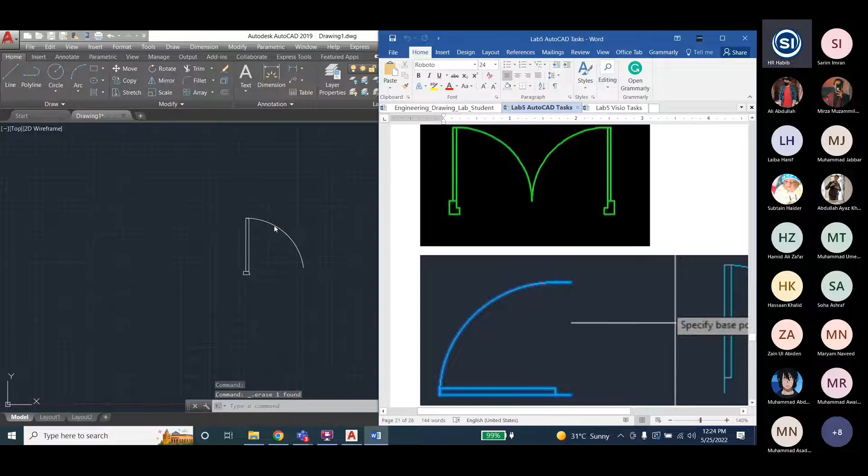Now you want to color it. First you can group it, select, just click and drag, and then click again, it will be selected, and then you can group it. Group option is available here also like this. Now it's grouped. No need to rotate it, otherwise you can also rotate, but now our door is ready.

Now we want to replicate it, just mirror. We want to use the mirror command. So how to use mirror command? Now we'll go to Modify. There is a mirror command, this one. This one, first command we want to use, this mirror command. Okay, so here is the mirror command.

Modify, mirror. You can draw any other figure. Maybe if you feel difficulty drawing this figure, no problem, just a simple figure you can also draw. Just go with the flow and do what I'm doing. Just follow me and click this modify command.

Just mirror, select object, I have selected. Then press enter. It will say specify first point of mirror line. So the mirror line is like this. For example, I want to mirror it, I will draw a line for you, like this one, and it can also be mirrored in this way.

In this way, I will color it first. Right click, maybe you can color from here. Yes, you can color, and you want to change the thickness. Properties. Can you change the thickness?

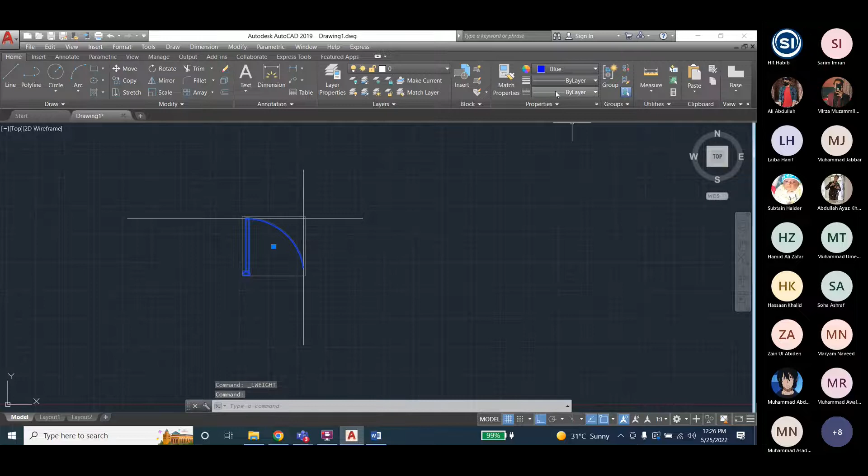Okay, maybe you can change the thickness. Just change your thickness, if you will change, then let me know. Yes, here you will go, for example this one, and display line weight must be checked, then okay. Then maybe update command. Selected, and yes, in this way you can change.

Now you can see here that, for example, I want to mirror it. So mirror, just click the mirror, select this object and press enter. I want to mirror, specify first point of mirror. I want to mirror along the vertical line, meaning it will mirror to the right of the vertical line. So for example, vertical line this one and then this one. So you see, oh sorry, again.

Mirror, select the object, enter, first point, then there is a second point. And then it will ask to erase the source object. If you want to erase this source object, then you will say yes, you write yes and press enter. By default it is no, no means it's okay, no need to write no, you can write no also, otherwise no need, because no is default, just press enter. When you press enter, you can see this is mirrored in this way. And if you want to mirror it along the horizontal line, it will be mirrored above the horizontal line. For example, modify, mirror, select the object.

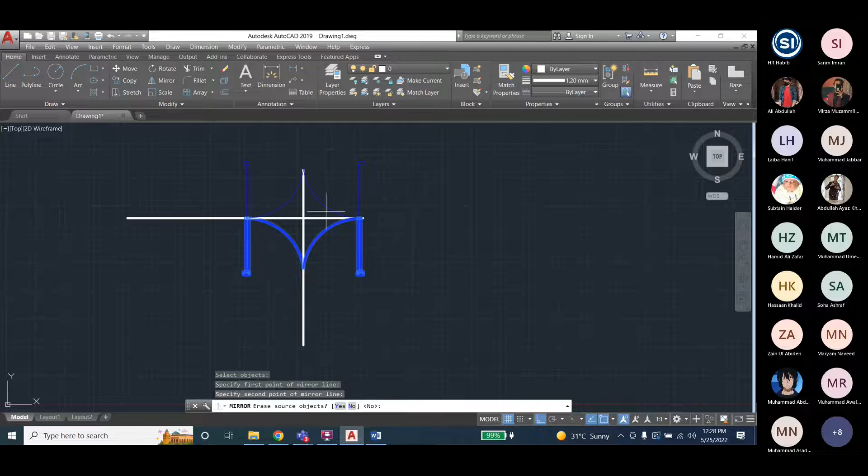If you select both objects, that's also okay. Pick a specific point, for example along the x-axis, this point and this point, then press enter, and it will mirror in this way. So now you have the concept of how to mirror an object.

In the modify command, I have switched ortho on. If ortho is not on, you can still mirror: select this object, press enter, and now there's no line, just specify the first point of the mirror line. No problem, just select this point, for example, like this.

In the vertical position, when you drag your mouse, you can see the placement of the object. And when it is confirmed, click it here and press enter. So like this, and also ortho will help you place it exactly.

At right angle, for example, if ortho is on, you will see if you click it here, it will place here. And if you click like this, it will place below the horizontal line. In this way it will place right to the vertical line, taking the vertical line as the base point.

Similarly, you can do this, only vertical because ortho is on. If ortho is not on, then you can move it and rotate it anywhere, as you can see here like this.

So if I press F12, I want the specific second point of the mirror line. You can see this one is 0, this is 0,0, okay? I will take it as 0,0. This is 0, then shift enter.

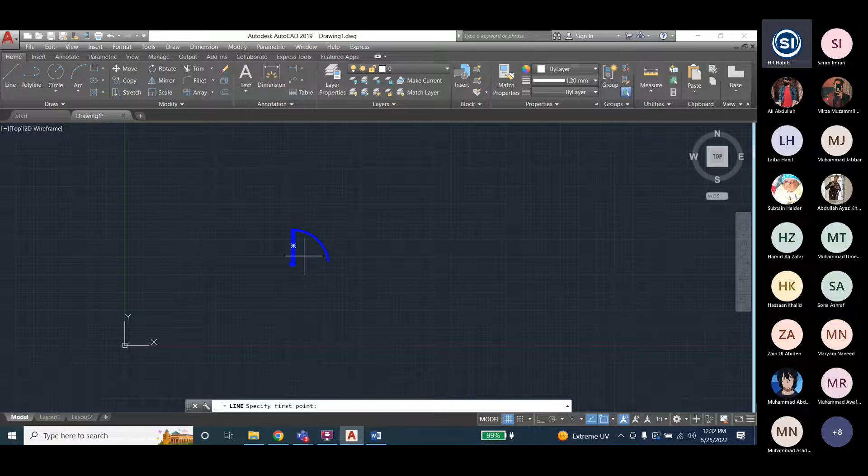If you want to see this base point, how do you check these coordinates? How can we check the coordinates? You can see here that the coordinates can be checked.

Under Dimensions, there is an ordinate option. We used ordinate last time. So I will place ordinate here. 28.0 and then...

Ordinate: so this is actually the x-axis distance, 28, 28.04, and this is 12.03, 28 and 12. So I will take 28 and 12, then I will apply 28 and 12. Just remember it.

Yes, and now I will just apply shift F12. Shift F12, yes. No, again shift F12, I want to write in the command window.

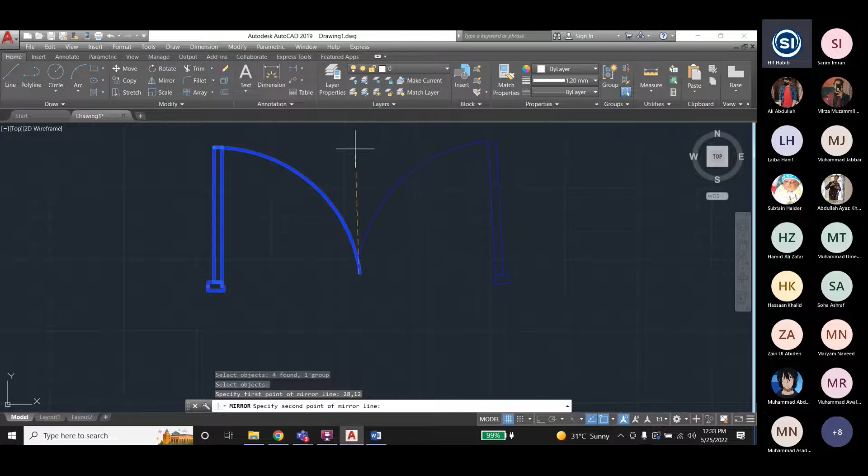First specify first point - first point is 28,12. Yes, specify second point of line. Second, any point I can specify, for example 28 and 12, meaning 28 - x is same, 12 meaning I can write it 20, for example, any vertical point.

Then it will ask to keep the source object, no or yes - I want to keep it, don't want to erase, press enter. Yeah, like this, but the exact point is not there, so you can specify the exact point like that. So in the command window, you can also write it this way.

So mirror is done. The next one - if you have any question, you can ask. Now, copy - I want to copy this. So let's...

Go to copy, select object. For example, you have the rectangle - I want to draw any rectangle. This is the wall, for example, this is one side wall of the door. This is 2D dimensional, and here you can see, for example, a door.

So I want to copy it. Go to copy, select the door like this, then press enter. Specify base point - for example, my base point is this one, and then I want to place it here. With ortho, you can place it on like this.

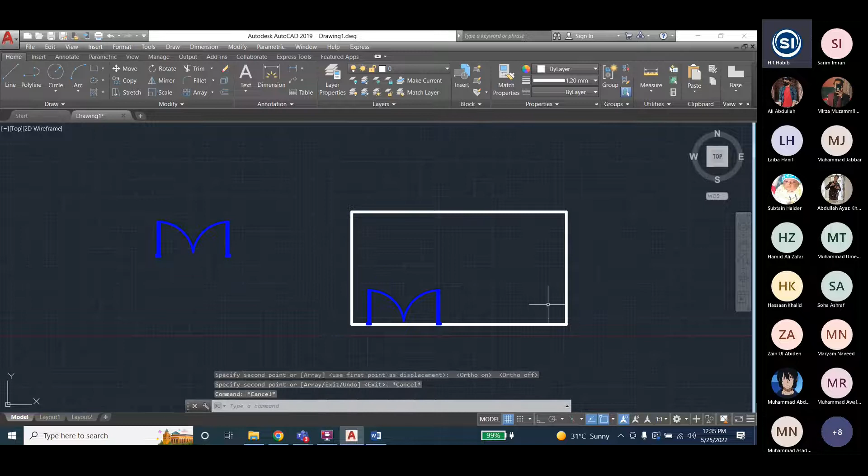I want to place this like this. So the door is placed. Now, for example, here the door is one, the door is also here. So I want to copy it, modify and copy, just like this object.

Click the copy, click this one, press enter, and then you can just click this one and place it. If ortho is on, it will be exactly in horizontal position like this. For example, one door is there, or two doors, you can move also if two doors are here like that. So in this way you can use the copy command.

Then there is an offset. For example, there is another rooftop of the building, a rooftop of the building here. Say you want to use this rooftop for the installation of solar panels, or you want to use the useful area. The useful area is not the boundary of the wall, because if you want to install solar panels, you cannot install them exactly at the boundaries. You want to spare some space from all four sides of the boundary. So that is called offset.

So in modify, offset, just click specify offset distance. For example, you want to place, because we are working in inches, I will say 2 inches. For a small building; for a bigger one the size maybe in feet or meters. So here, for example, I will say 2 inches from all sides.

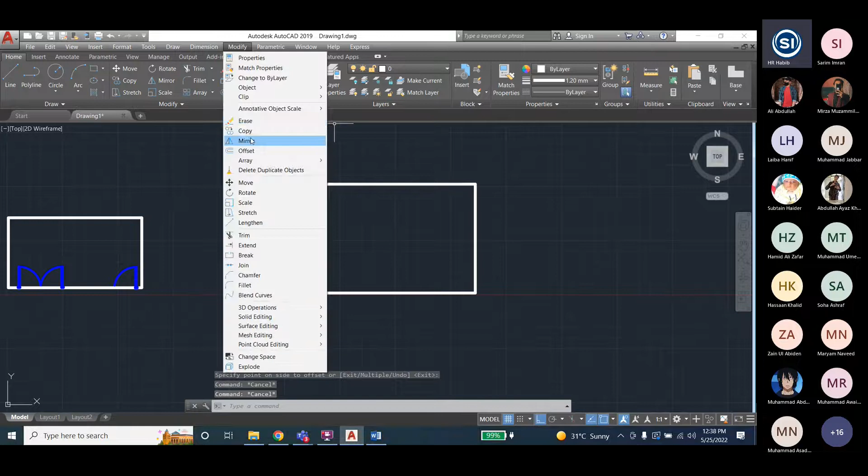So you just move the mouse outside, and it will say the offset is placed outside. If you move the mouse inside the object, it will say the offset is inside. You want it inside, then you press enter - no, not enter, you have to again go to modify, offset, it's already mentioned. So just press enter, select the object, move inside, for example here, and it will say specify inside. Left click on the mouse, then press enter. Before pressing enter, you have to left click on the mouse. So the offset is placed inside.

So identically, 2 inches from all four sides is spared. This area, we are not using, and this is called the offset. Now we will place all the solar panels or everything in this area, and the outside area, which is the 2 inch offset, we don't want to use. For example, we want to walk through there, or need some space just for cleaning or something like that. So these are the practical applications.

You can also fill this using the hatch command in draw, and pick the point inside like this, and fill it with any color like this. So in this way, you are done.

Now the next command, offset, and then there is array. But before doing array, maybe we can finish rotate. So rotate is the last command. Let's rotate it.

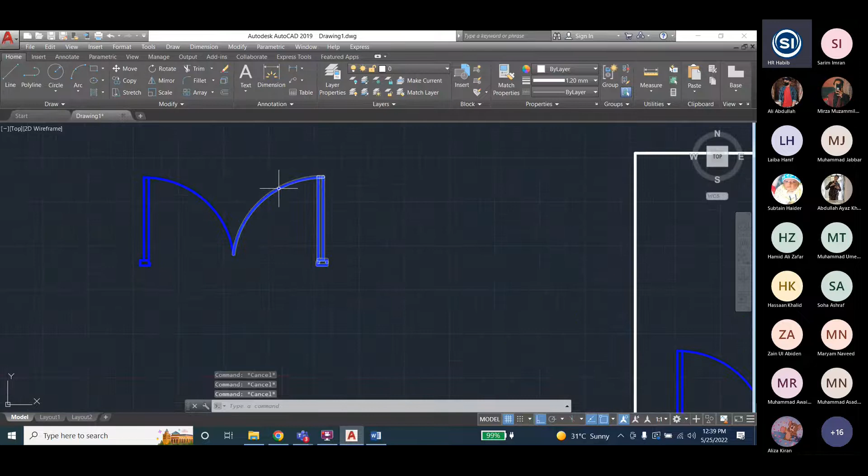For example, this door we want to rotate and place here on this side, this wall. So we want to rotate. Just go to modify, rotate, select the object, this object, okay, and then press enter.

Select as many objects as possible, then press enter and specify the base point - the point where you want to rotate will be fixed. For example, at this point I want to rotate, so you see this point is fixed and the remaining whole object moves around this point.

Now it will say specify the rotation angle. You can switch off ortho if you want any angle like this. And if you want to exactly specify vertical, ortho on will be helpful - only with the help of mouse you can do anything, no need for this, only 90-degree rotation on the axis like this.

If you don't need ortho and want to specify rotation angle, you can type it. For example, this angle is 270-degree, this is 0-degree, this is 270 and this one is 180. This is 180, and this is 90, okay?

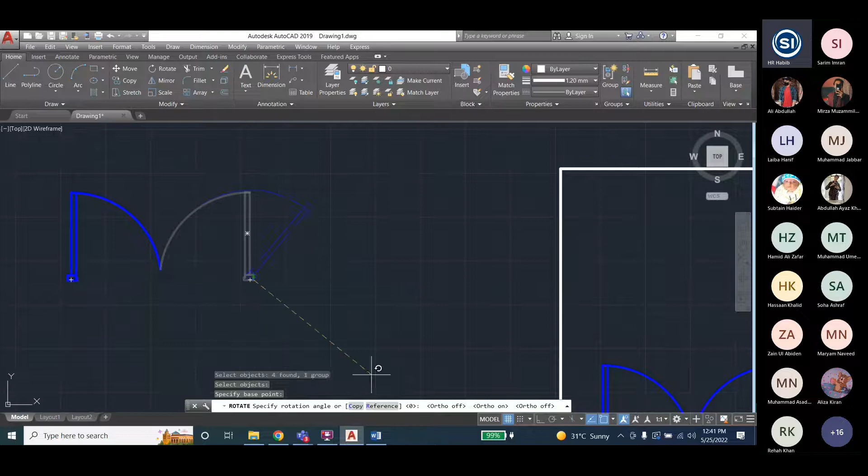With the help of mouse, you can see which angle you need. We need actually this angle - this angle is 270, so I will write 270 and press enter. So you see it is rotated.

Now, for example, I want to move it here, and the whole object I can also rotate. For example, control Z - I want to rotate the whole object. Go to modify, rotate, select all objects like this, in this way you can also select, press enter. And for example, pick this point and then 270.

So in this way you can move. Now select this and you can move - for example copy also and move also. Move command we can use because we don't need this source object. Move command is also part of these modify commands. We already used copy today, now we will use move - move means move, no need, there will be no source anymore, it will be totally removed.

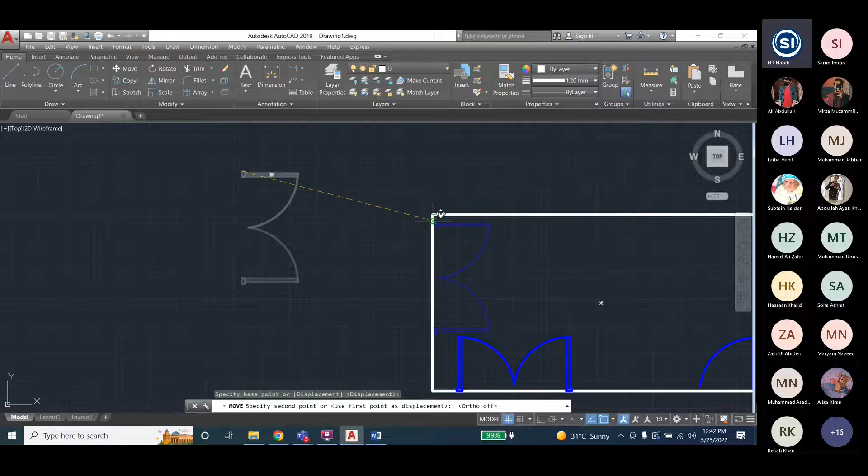For example, move, and we want to place it here on this wall - on this wall the points will be this one or this one, so we will choose this base point. For example, from here it's easy, so I will choose this point, so it will be easy for me to place it. I want to place it like this - you can turn ortho off if it creates a problem, then you can place it here. So in this way you can use the move command also - rotate and move, we both used.

So now this lab 5 is done and array is remaining. So now we will apply the array command.

So in the array command, you can see here, I will apply the array command. First, for example, I want to array. Why do we use array? Array we need just for multiple objects - if we want multiple objects of the same size and everything the same, then we can use the array command. Multiple rectangles we want to draw - why copy paste, copy will take time. So you can use the array command, let's try.

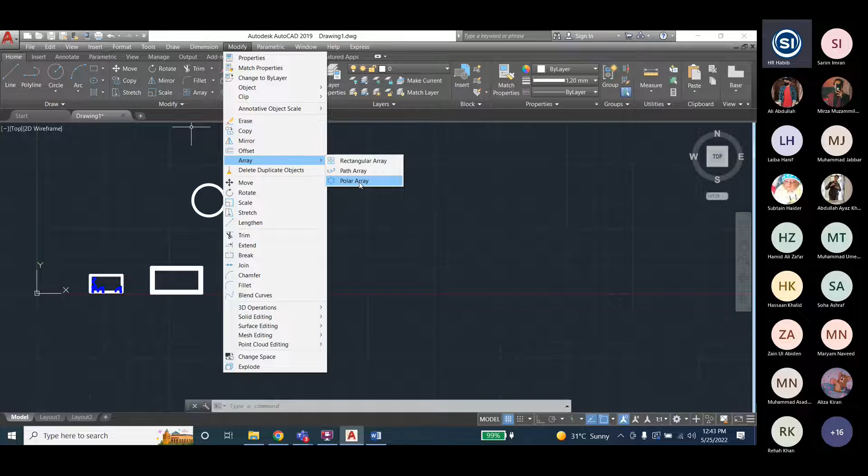So for example, this one is the circle and I want to draw these circles multiple times. I will go to array and rectangular array first - rectangular means rows and columns, polar is around, you can say polar around 360-degrees. Rectangular array will say select object, I will select this object, as many objects as possible you can select. For example, I will draw one circle inside this rectangle, like this, and I can hatch it just to make it beautiful, like this.

You can pick point for the old version, otherwise this. So like this is our shape. Now I want to place these objects with the help of grouping - for example, this is the complete object, I can group it, so now it's grouped. Now it's a complete object.

Now go to modify, and then there's array, rectangular array. Select this object, press enter. So it will place multiple arrays like this, because by default it's 4 columns and 3 rows, and you can say 3 rows and 4 columns - 4, 1, 2, 3, 4 columns.

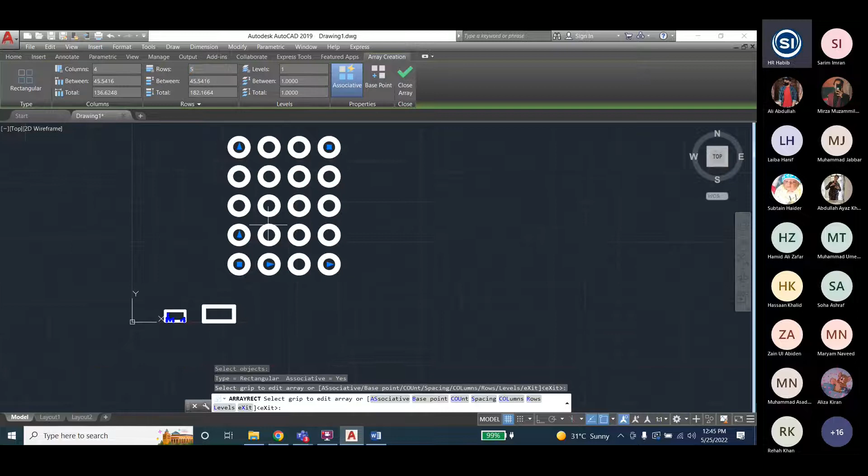So I want to change rows, for example from 3 to 5, and you can say 5 rows, 4 columns, okay? And similarly, rows is only 2, for example - so the rows are only 2. So in this way you can change it.

And the distance between the columns, 45, I will change it to 30, for example. So in the columns, you can say these are 35, 30 - 30 is very congested, very little distance, I will take 40, for example, 40. Similarly for rows also, distance I can say 40 - 30 rows distance will be very less, you can say overlapping, so I will say 40 is okay.

So 40, and level is, oh yes. When you click it in the newer AutoCAD version, this window automatically appears. This is the array window. If you close this array window, it disappears. When you click this again, the array appears.

And there is also an option called array edit. If I click and select the array, here is the option for different things, like replace, base point, and so on. You can replace any other object with this one.

So select this one, and then levels. Levels is 1. Level 1 just means go here. For example, go here, you can see north, south, east, west, and there is a home option. Just click home, you will see it in 3D dimension.

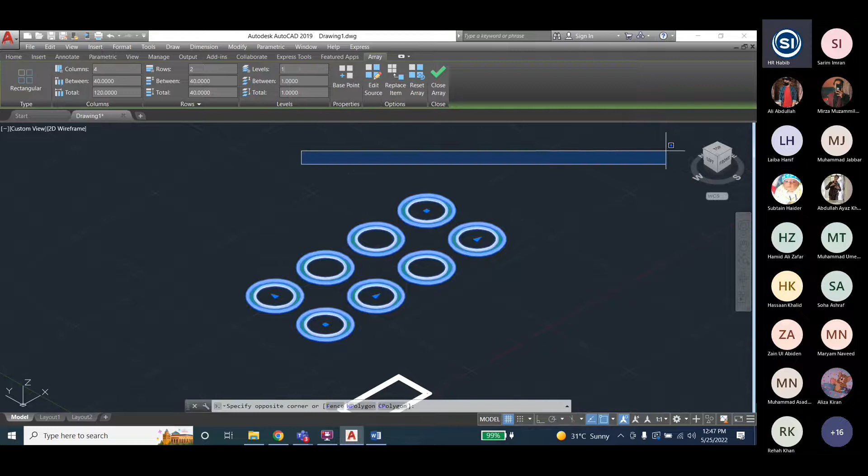When you change the level, for example, I will change to 20, level is 20, so you see in the Z axis it is extended. And level 1, like this. So again click this top, and you will be in 2D dimension. Now click this object and here you can see the replace item option.

You can replace the item.

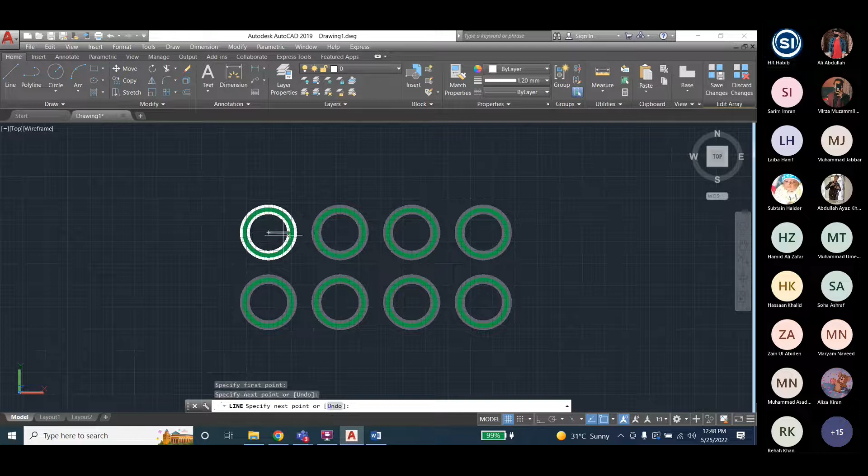Now you want to edit this object, so just go to the line command, for example line command, and I will draw a line like this. Press escape. You see this line is drawn in all circles, so no need to repeat again and again. Just edit in one circle and everything will be changed in the remaining circles.

For example here, like this, and like this, like a vehicle tire. So in this way you can...

Now discard changes or save changes. It will be the same. Discard means it will be discarded. So save changes, I will say save. So saved. Okay, I will click again, and now there is a replace item option.

Replace item, okay, let's replace this. Now to replace, I will draw any other circle and I want to replace it, for example I want to replace with a rectangle. For example this is a rectangle, and I want to replace this circle with this rectangle.

So you also try, for example, replace, select replacement object, this object for example. Press enter, select the base point of replacement. So it is taking this one as the base point. For example, I will... okay, enter.

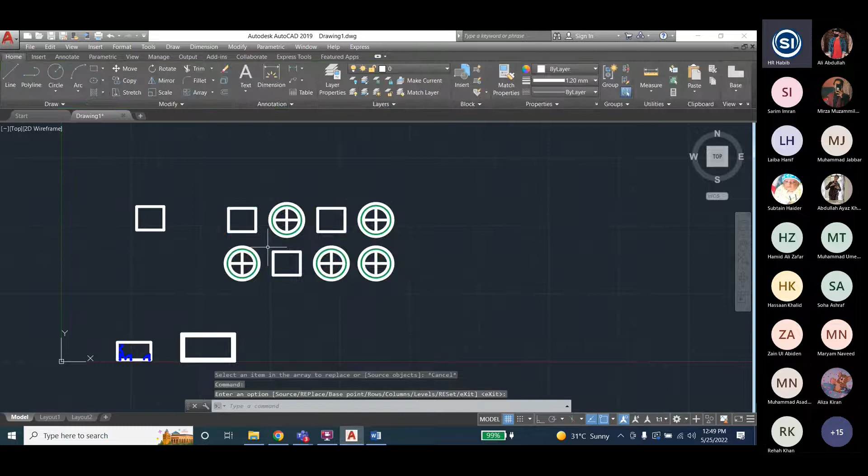So you see, all the objects which you wanted to replace are replaced. But keep this in mind: when you want to apply these changes, use replace item, and then it will say select replacement objects. For example, I draw one circle like this, and I want to replace this with another circle.

For example, this is my shape, like this, and I will group it. Just group it, group, no it's grouped. Now I want to change this with any other shape. So again select this array, replace item, select this object I want to replace as the first object, and then press enter.

And now it will say select the base point. You will not select the base point, you will not do anything, just press enter, simple. And then it will say select the item in the array. For example, this item I want to replace, this item I want to replace, and this item I want to replace. So in this way, press escape and close the array, or escape also works I think. Yeah, so in this way you can replace.

So with these arrays you can draw as many objects with the help of replace, and things like that.

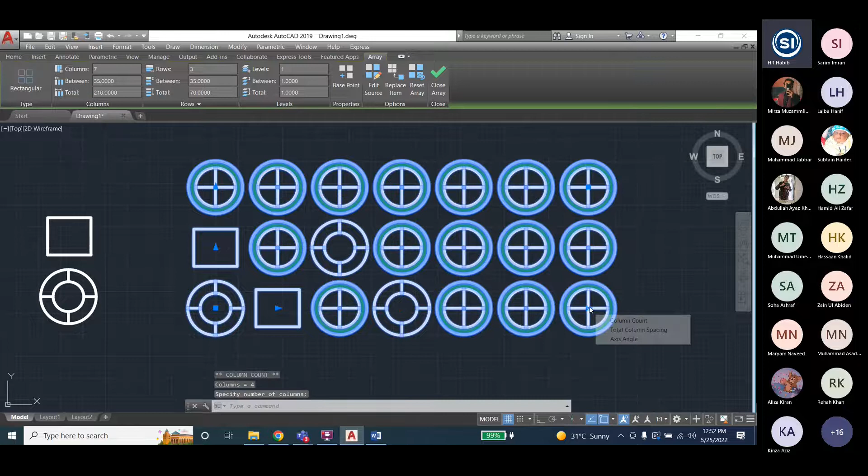There is another option. For example, you will select this row array, and you will see here there are arrows. If you click this arrow, hold it, and drag in this way, you can change the columns, as many as possible, like this. Columns change. If you want to reduce the column, just click this arrow and go backward. Click this arrow.

Click the array, then press and hold and go backward. Like this, okay, press and hold - columns increased. Press and hold - column reduced. As many columns as you want to place, like this. And similarly for rows, if you want to change the rows, just use this arrow. As many rows - reduce the rows like this.

So in this way you can increase the rows like this. And there is also an option - for example this arrow will change the distance between the rows, the spacing. You can see now the spacing between rows changes, and spacing between columns will be changed like this, with this arrow and this one.

And this block - you can see there is a square block in the center, the last diagonal item. You click it and drag towards the diagonal, and you will see rows and columns instantly or collectively change like that. If you want to change only the rows, like this, and in this way only columns. If you go upward, rows change; rightward, columns change, like this you can see.

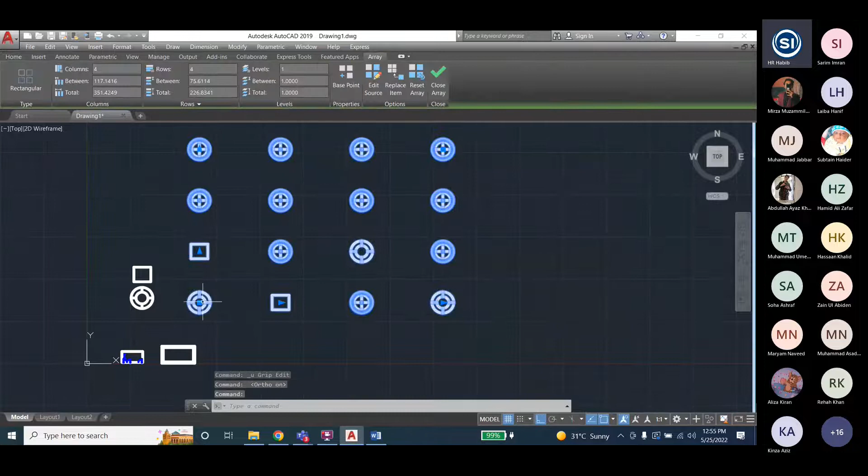Similarly, this point, this square - if you put it like this, you can move it that way. And if you want to move exactly horizontally or vertically, then you switch on the ortho command, select it, and then move. So it will move exactly horizontally or exactly vertically. In this way you can move.

Okay, so like this you can turn ortho off. So this is the rectangular array command we have used. Now I will use another command.

In the array, for example, there is another command - array, there is a path array. Before path array, I will use polar array, because path array is not available in older versions of AutoCAD. So I will use the polar array. And for polar array, for example, I will draw one circle.

For example, this one. Now I want to place this object, for example. I can make it a little bigger. If I want to extend, maybe I will use the extend command. I want to enlarge this one. I think - stretch, or maybe scale.

Yeah, scale. Specify the base point, this one, then I will scale it. For example, I want to scale it 2 times, so it will be doubled like this. So in the modify scale command, we also use the scale command.

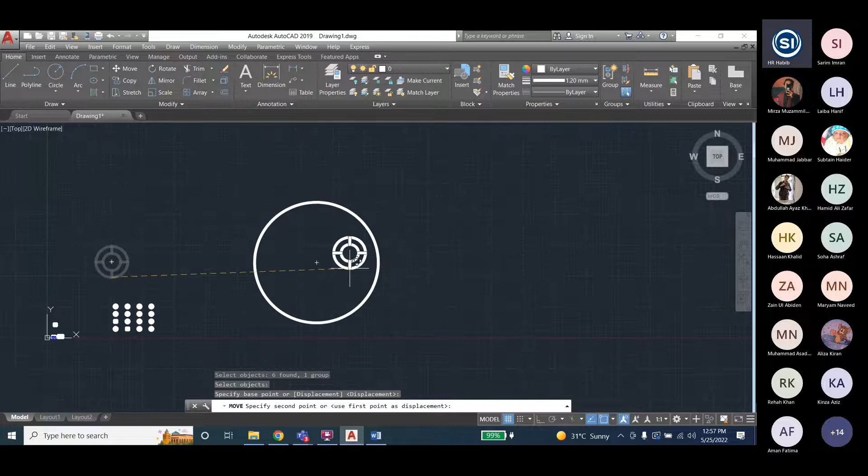Now I will move this to the border of the line. I will select this, press enter, pick the bottom point like this one, and place it at the edge of the circle like that.

Now I want to repeat this object around the circle. So I will go to array, then polar array. I will select the object I want to repeat, press enter, and specify the center point of the array, the center point of the circle. You see it is repeated 6 times, because the items are set to 6 here.

So I want to change it to 8, for example. You see it will be changed to 8. I want to change it to 15. That's much bigger, so 10 is okay. So it is 10 like this.

Now rows, for example, 1, I will change rows to 2. So rows will be 2. And rows, for example, I want to change to 5. So you see rows are 5, so the figure will be something different. In this way, different styles and designs you can create using the polar array.

Now I want to use only one array, one row. So row is 1.

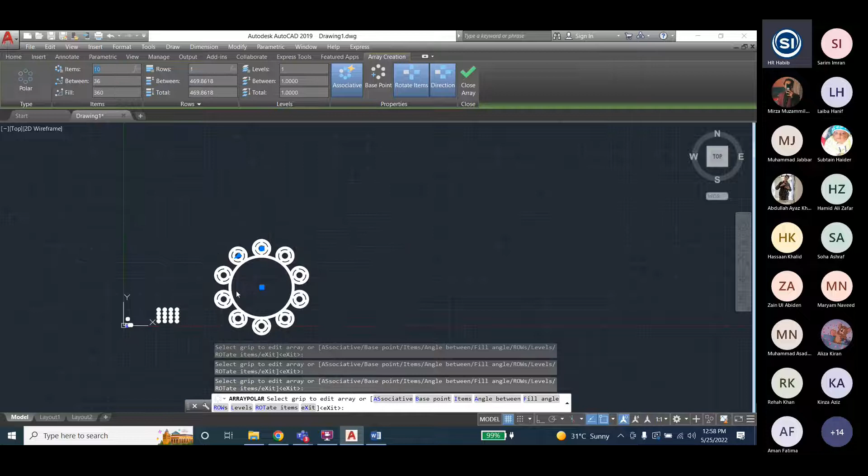Now the distance between the rows is 36, items between the items is 36. So if I change it to 20, what will happen? So like this, distance between is 20. All the items are covered here because my items are 10, so it is covered because only 10. If I say 15, it will be covered like that because the fill is 180.

180 means 180 degree fill. If I ask for 360 degrees, it will be 360 degrees. Then definitely the distance between items will be 36, because 360 round, then by default 36. If I change the distance between the row items, it will definitely realign the angle because both are interdependent. So in this way you can change it.

So here you can see, if we close the array and select one object, all the objects are selected. If you want to select only one object,

there was an option before ending this command. There was an option here called associative, and that was checked. You will uncheck that associative option, and then you can individually select any item.

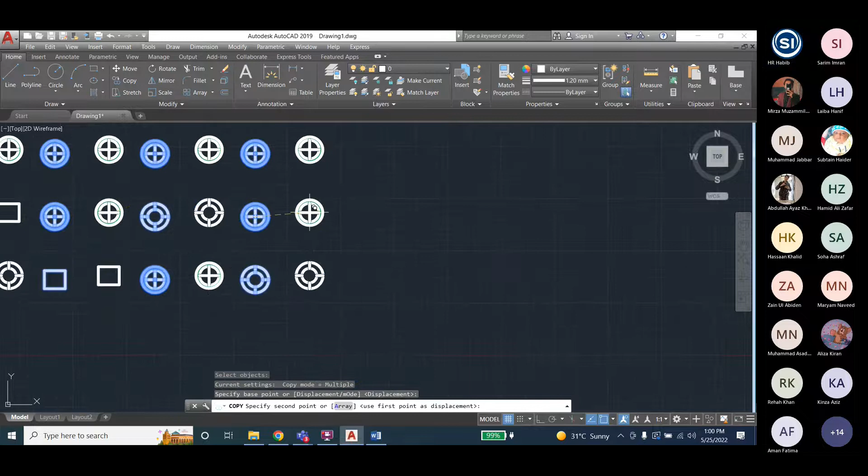I want to copy it. Select this, enter, center point. Oh, it all got copied as a whole.

So I will select array edit, enter, select the array. So if you want to select one item, how will you select it?

Okay, discard changes. So let's see, because this one is the array using the associative command.

Here is the associative command. When I see this command during the session, I will let you know there was such a command, but it will come only when you repeat the same process. For example, this one, modify array, rectangular array, done.

Okay, now this one is the associative option. Actually, you will uncheck this one, associative unchecked. Now you will see, if you want to copy this, okay, and close. Now you see, if you want to select individually, you can select.

Now if you want to copy it, copy this one, and you see only one you can copy as many times as you can, like that. But here, because before ending the array command, there was an associative command option. Keep it in mind that it's before ending that command, otherwise it will not appear.

So now I cannot copy the first one. You have to select the whole array and I will copy. For example, I will try another way. Maybe we can do it like this. Then I will select, for example, but I cannot select. I have to select the whole thing, I cannot select individually.

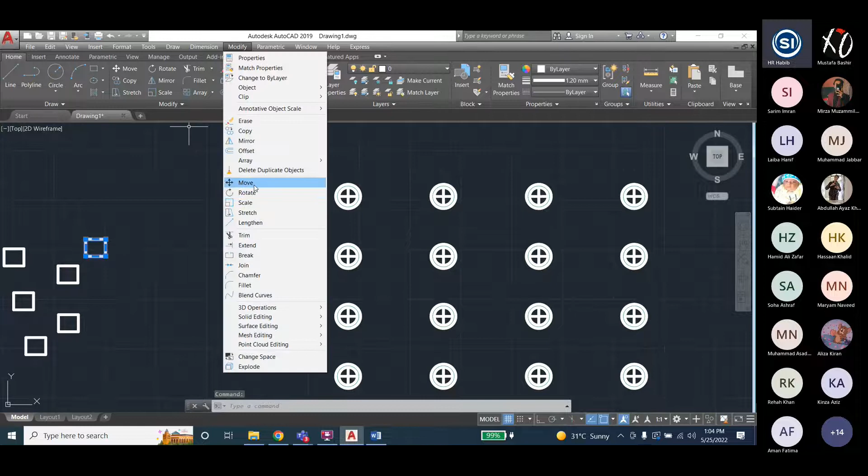Okay, I will replace this object. First I will copy it. I will copy it here, for example. Escape. Now I will scale it - modify scale, select, enter, or right click is okay. Press and for example 4 times, 5 times.

Now I want to replace, for example, just select this command and replace item. Select the item, press enter, select the base point - no base point, just press enter. Then select the object, select the item in the array to replace. This one, this one, this one, this one, like this.

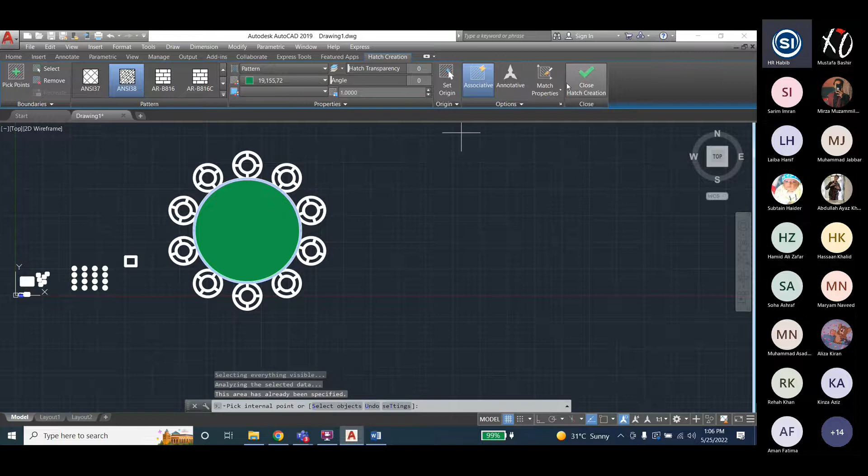Now again, for example, this done. Oh yes, done. No, let's go again. This is another command, modify command - there was an option, array command. Sorry, there is a path array. So path array, for example, I draw the arc. For example, arc.

This one, arc. There was a spline, I think so - a pline. I will use pline. No, pline. There is a draw, there was a polyline here. Polyline. Spline here, spline, control vertices.

For example, like this, any figure - like this. Draw spline. Okay, now I will not press enter. If you press enter, it will disappear. You will press, I think so, escape - no, escape. Because in all commands we use escape, but in this command specifically you will press enter. No, is okay. So now, for example, this object I want to replace.

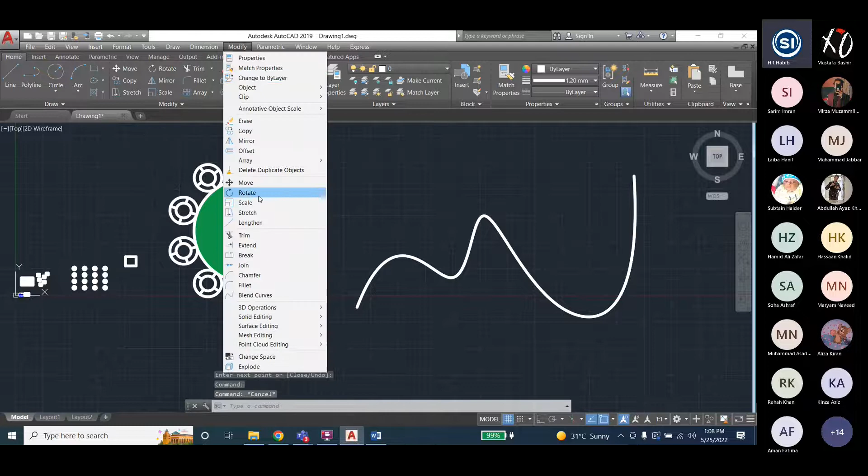Repeat. For example, I place this object, move this object, or copy this object, right click, and I will copy it here, for example, here. Escape. I want to repeat - modify, array command, path array, select the object, this object, press enter, or select the path - and this is the path. So you see, now it is repeated many times. So now if you want to make it associative, you will select associative.

This is uncheck. Now tangent direction - there are other options you can use, divide here, divide like this. Okay, so it's done. Close array. So in this way you can use the array command, that is path array. So in this way, 3 types of arrays you used.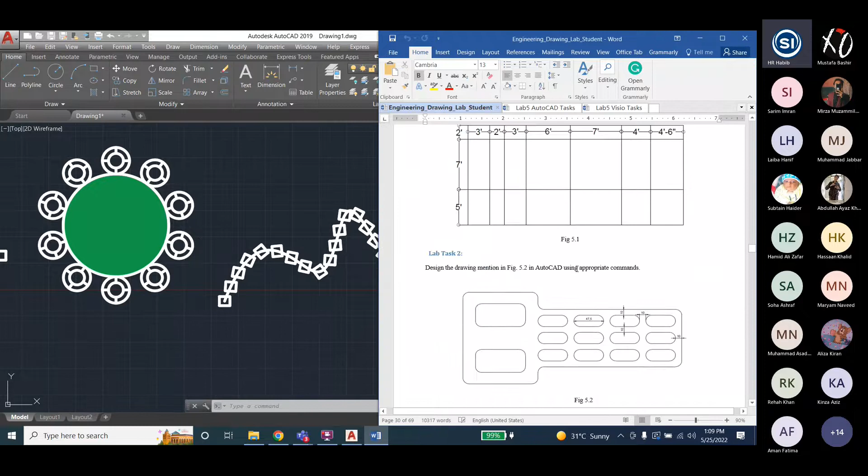Now this lab is done. Now we will also use lab. Lab. Now these two tasks you will apply. Okay, these 2 tasks - how will you apply these 2 tasks? Just I will hint you, just a helping hint.

For example, this small rectangle is 2 by 3 inches. This is 7 by 3 inches. This is 5 by 3 inches. So you can draw the full rectangle first. For example, this full rectangle size is 7 to 9, or 14 by - this you can count. So 14 by this length, you will draw this rectangle and then apply the line command.

For example, you will start from here. No, not from here - this is the dimension actually, from here, this point, yeah, from here you can say this point. From this point, you will use the line command, horizontal, 0 degree angle. The line command is 3 inches, so you will apply 3 inches.

Any units you want, inches or feet. This is feet in feet. If you want to convert it into inches, you can do 36 inch like that because our window is in inches. Draw this line, then you can again draw one vertical line at 90 degree angle. There is a line of length 5 inch. Then you can close these two lines, so this rectangle is drawn.

Or in other ways, just from here, use the line command: 3 feet, then 2 feet, then 3 feet, then 6 feet, then 7 feet, then 4 feet, then 4 feet and 6 inch like that. So these are the lines.

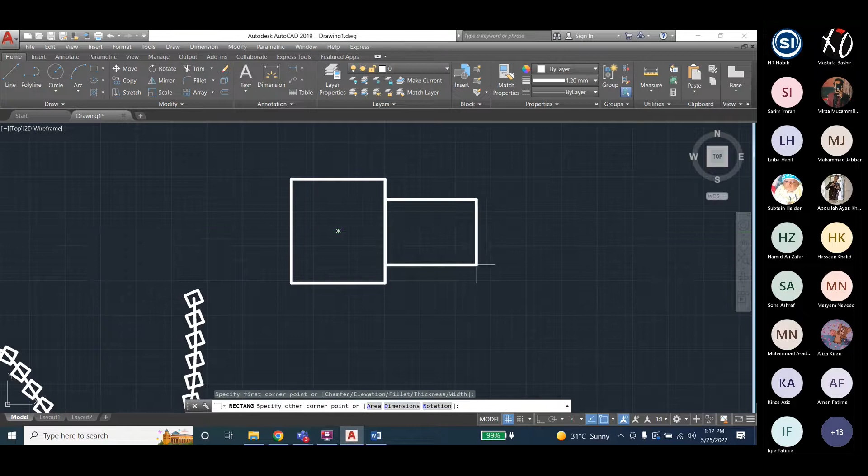How do you use fillet? Just draw the rectangle. For example, I will draw two rectangles like this, then there is another rectangle like this. So I will first use the trim command.

We also use the trim command. How to use trim? Just select these two objects, right click or enter, then you will trim these two lines. So it's trimmed, press escape. You see these two rectangles' outer sides are merged.

Now you want to fillet it. For the fillet, just go to the fillet command to round the corners. Fillet, press, and in the command window you see select object, radius. Here you will see a radius option, and you can round it with the help of radius.

It will say radius. For example, I will say radius is 1. Press enter, and now it will say select the objects. The corner which you want to fillet, select the two lines of the corner. Now it is filleted, but with radius 1 it's very small, you can see this one is round but its radius is 1.

Now I will again use fillet, enter, and again it will say radius, and I will give radius 2. Now I will fillet this one and this one. So it is filleted, you see, fillet.

Again press enter. Now radius, I will say 5. Enter. And this one and this one. You see, it is 5. 5 is also smaller, I will again enter.

Radius, I will say 30. Now I will put it on this one and this one, 30. You see, no difference is more. Press enter. Radius 50, this one and this one, 50. You see the difference. Enter. Radius 100, enter, this one and this one is 100.

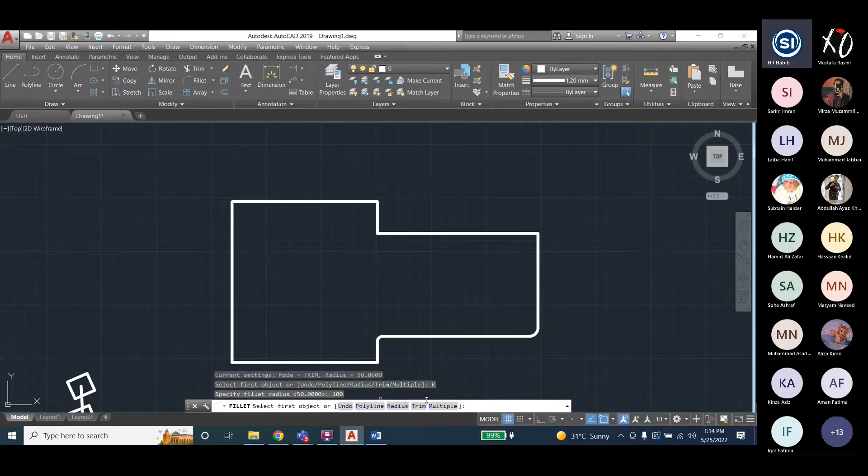Like this, enter. Radius 150, and this one I want 150. In this way, you can use the fillet command, 200. You can use the fillet command to convert the corner into a circular shape of the radius specified by you in the command window, and press escape to end it.

Now as many times as you enter, you will get the fillet command, you can reuse this fillet command multiple times. So now, if you press enter again without entering the radius, the command will be ended. With the help of escape this command will end, but if you press enter, this command will again appear. Again, without writing anything, press enter, then this command will be ended or finished.

So in this way, you can put all these smaller figures inside with the help of this 10 units distance, and you can use the array command. Just draw one and then use array command, place one where you can see this distance between is 10. Between columns is 10 and between rows is also 10.

You can place the distance, and this length of this rectangle is 47.5, and the distance from this side is 10 inch. So you can place this, and these are identical. You can see the distance from here and here is the same, so you can place it. This task can be done.

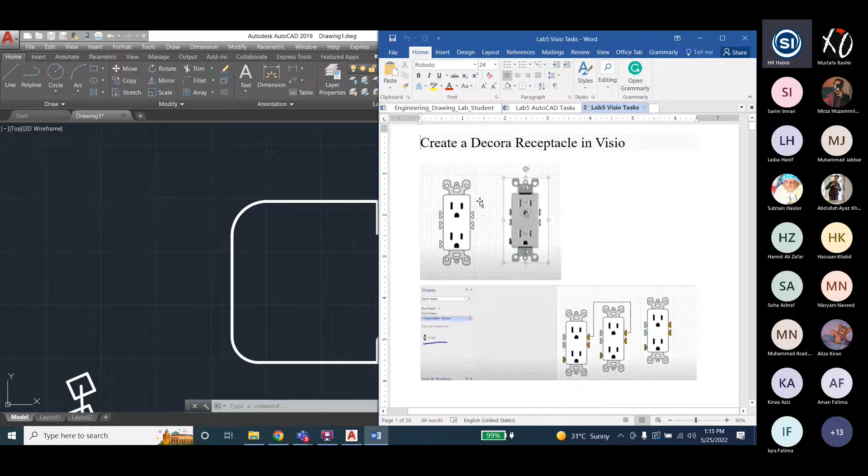Okay, now before going to lab 6, let me first finish the Visio task. For the Visio task, I will need this figure. So we will draw this figure. We want to draw this figure, and then we will use the connectors and multiple figures, copy paste multiple figures, and connect each other, like this. So in this way, any figure you can draw.

So now I will copy this figure. This was the figure. I will send it to you. Okay, so can I send it

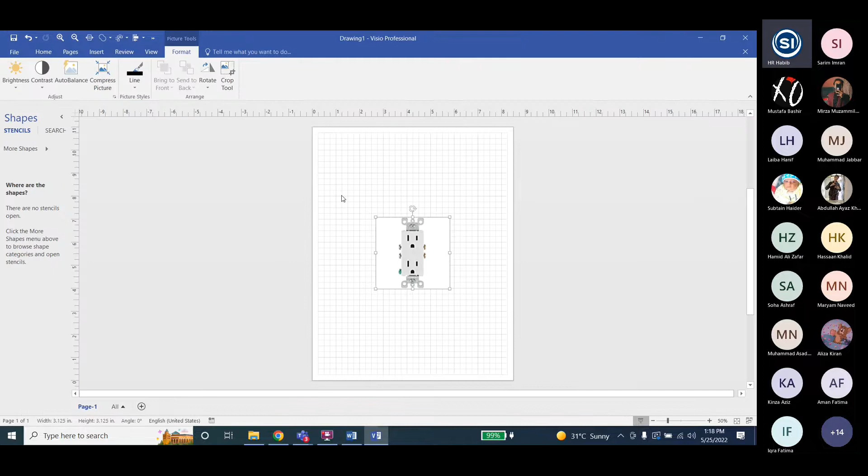Okay, so now you see, press and hold control, press control and hold it, and then use the mouse wheel just to zoom it like that.

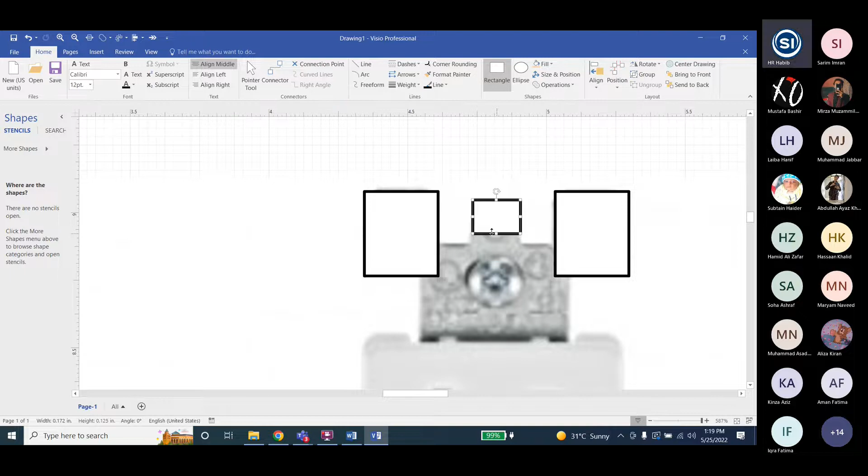Then also Control C and V, and this one shape is smaller, so you can drag like this, like this, like this. Okay, so you can enlarge it, no problem.

Then there is a bigger rectangle. You can copy it, yeah. Control C V and put it here, like here, here, like here. Okay, so this shape is done.

Now you will select all. Step by step we will follow. This done. Then you will union.

Just go to operations, operations may be your option. In operations maybe you can see in your Visio. I have this operation. If you don't have this option, then you will go to add to quick access toolbar, add customize quick access toolbar. Okay, and in customize you will see popular commands, and you can say all commands, and there is a geometric operation, geometric G, it will start from G.

Geometric G, just G. Okay, geometric operation you will add it here, and okay, when you will add it, it will appear here. Okay, and now union.

When you will select union, this figure is converted into union, and this is one figure now. All figures are merged. Union is a mathematical operation, union means the union of all.

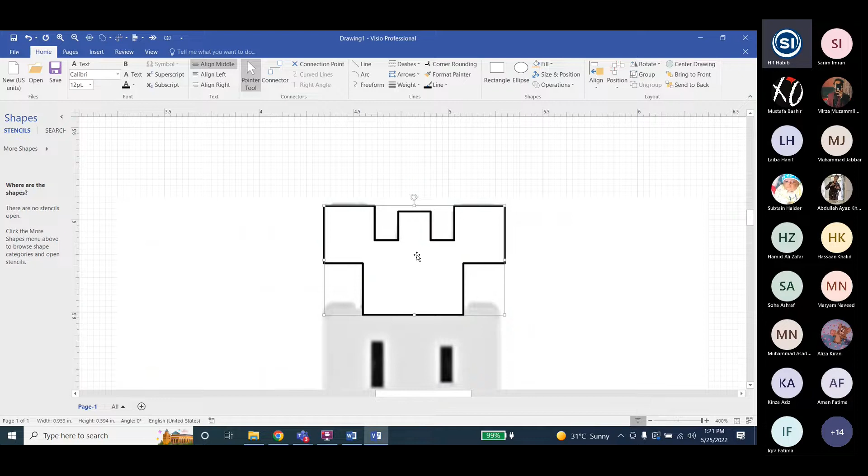This one smaller figure, copy and paste it here at the side. And now you will corner round. Just select the corner round and lines. And in the lines you will just, for example, this one. This one is very much, this one is okay, I think so.

0.0625 inches. Okay, now it's done. When it's done, you will drag it. Just select it and drag it to the original figure, so the lines should be overlapping.

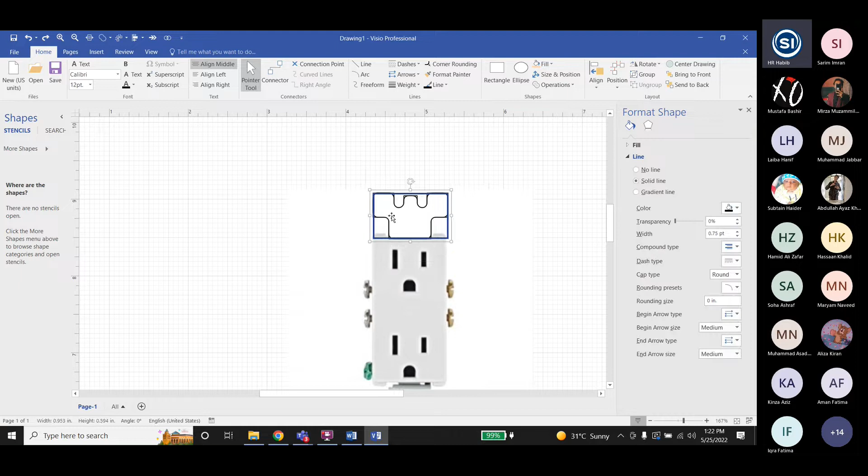Now you will select, but don't select the bigger figure. Keep it in mind: if you drag like this, the bigger original figure will be displaced. Don't drag inside the boundary of the image. This boundary is actually the bigger image, so you have to drag from here, for example. If you want to select these two figures, don't drag inside the boundary of the original figure, otherwise the original figure will be displaced.

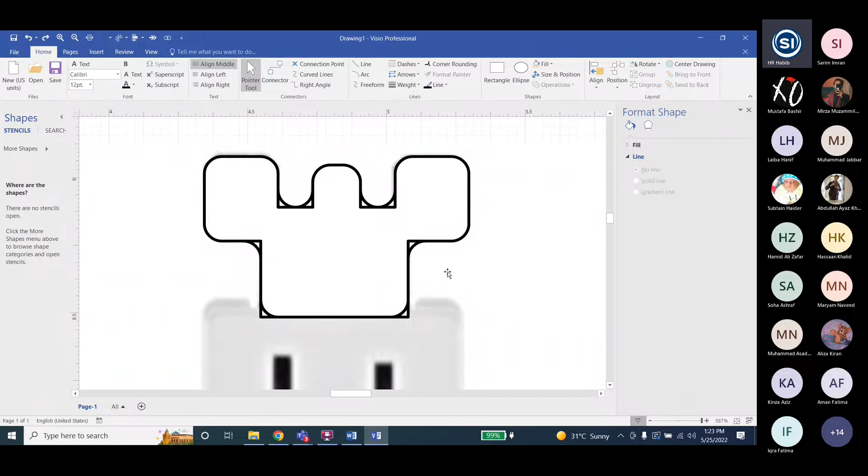So I will apply the union command. Maybe I will hold control, select this one and the bigger line. If I press union, yes, the union command will apply. This one control, the other one union. Now our shape is like this.

The remaining ones you can delete like this. This no need, this union. No, this round shape if you want to delete, it's not deleted. Okay, no problem, we will use the trim command.

Maybe trim this one, this one, this one.

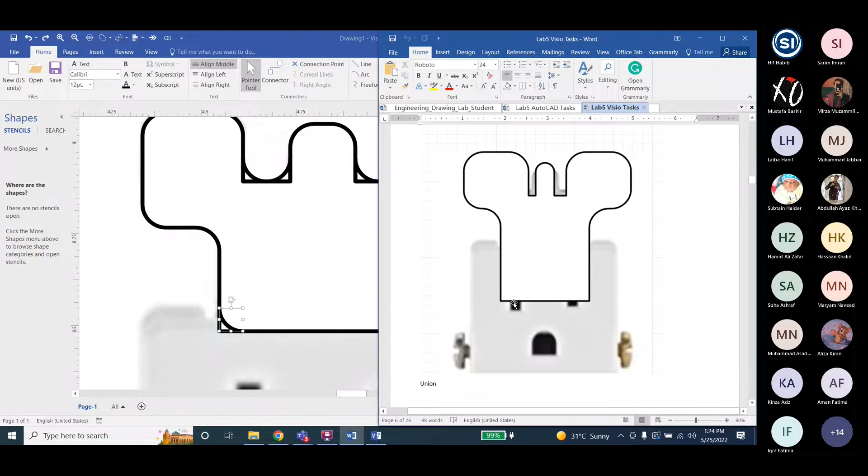No, we'll delete this. No, it's okay. The shape is like this one. Here you can see if you union it, maybe it will be rounded. No, it will not be rounded. Here you can also apply the union command. Oh yeah, it's okay, done. This shape is done. Now what we will do?

Now we'll send it to back, and we will draw the circles. Click it, send to back. Now we'll draw the circles. Just select the ellipse and draw the circle like this. You can change the size of the circle in this way. Control C, V, and place it here.

Control C, V, and place it here like this. Okay, and here is also the circle. Control C, V, there also the circle, I think so. Like this. This is not bold, I think so. If it is not bold, yeah, okay.

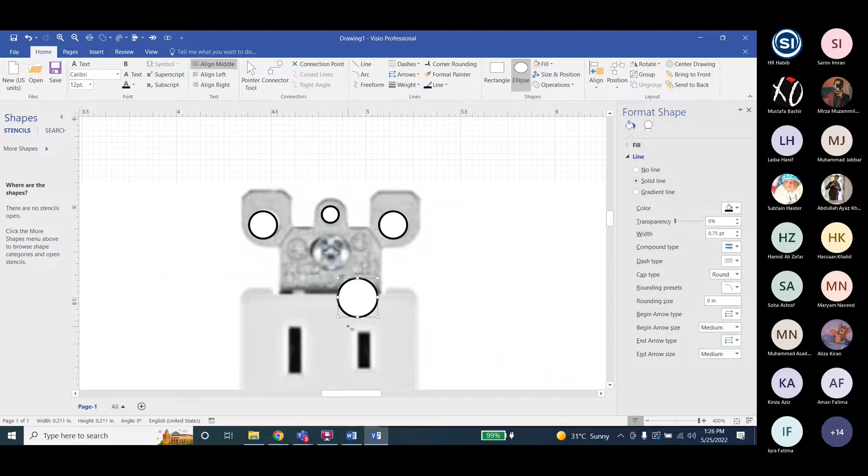We have inserted the holes. Then select all the hole group. You can group the holes. For example, you can select all holes, control and select, okay all holes, and you can group it. Group is this one. If group is not appearing again, you can go to right-click and group. Okay, grouping done.

Now we will, for example, select the object which we have drawn before the circles. That object is this one. This is sent to back. Now bring to front. Okay, bring to front, but the holes disappeared. Just select the holes and bring to front again. Okay, so this shape is ready.

Now, for example, you want to select both and align center. Select the group and this one and align center. Okay, so at align center, it will be aligned in this way. Okay.

Then again, this figure is done. Now you can group it and place this figure here.

Now it's done. These are actually the holes, and you want to delete this. First select this and fragment, maybe fragment. Oh no, Control Z. Maybe you cannot group it.

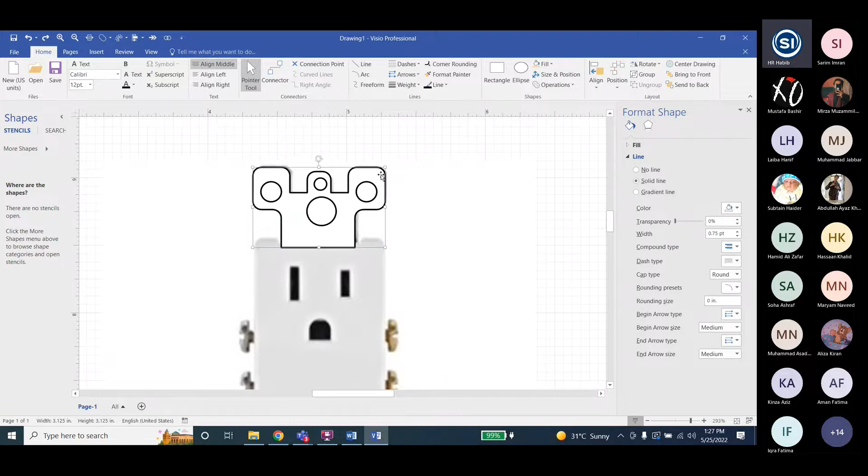First select both and drag it here and fragment. Yeah, fragment, and then now delete the circles. These circles you can delete. You can see the difference.

For example, I will put it somewhere here, and you see when I delete, the grid will be visible. Now see, the circle is transparent. You can see the circle is clear. Now I will fill this with any color.

Like this, so this is done. Now the same shape I will repeat it here. So I will put it here like this, zoom it, and just set it like this. You can adjust it.

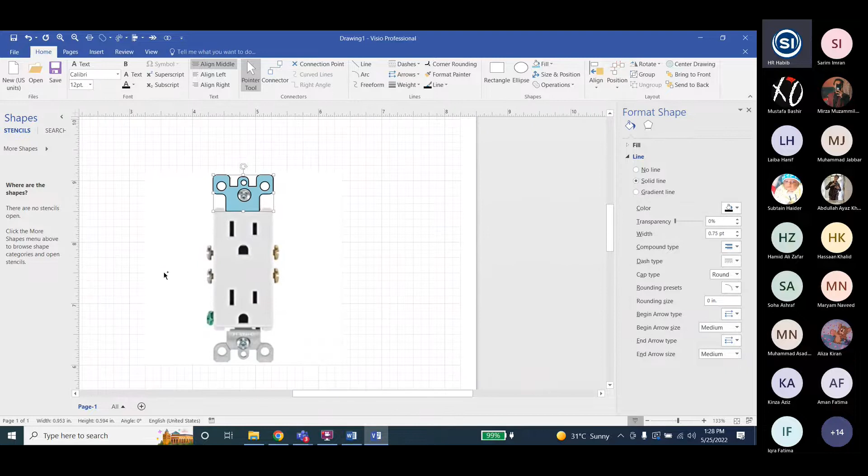Now for example, Control C and Control V, and rotate it. Control R, rotate. Okay, Control R, and then you see it is aligned like this.

It will show alignment, but now you can use the up pointer, the keyboard's right arrow, up arrow, down, and left. So you can use the up arrow to adjust like this, right arrow like this, for example.

Okay, done. This is done. Now we need this rectangle, the bigger one. So I will draw here again a rectangle, escape, and then just draw the rectangle like this.

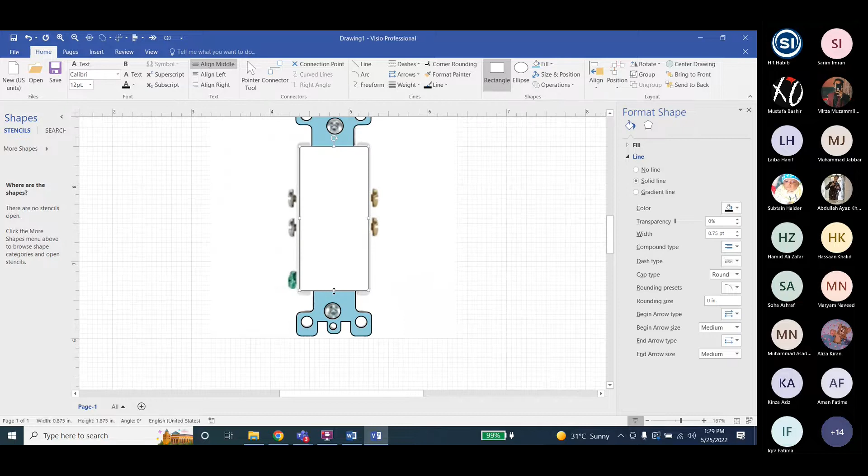Yeah, like this, this is okay. So this is done. Now you will select all and align center, and also distribute vertically. Select all, this one, and press and hold Control, then select all, and align center and vertically, not horizontal, distribute.

So it is aligned, okay? Done. And you can also group it. You group, escape. Now it's grouped. Now what you will do is send it to backward, and then you will draw the rectangles.

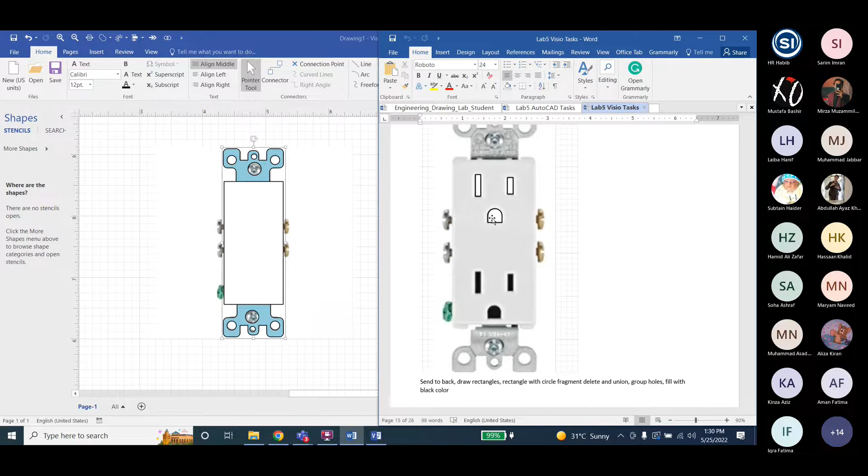These rectangles you will draw, and then you will fill with colors, okay? For example, I will draw it. Let's draw, send it backward.

Send the whole figure, I think so. It's not grouped. Yeah, grouped. Send to back. Yeah, now I will draw these rectangles. For example, this rectangle I will draw like this.

Yeah, Control C, V, and I will put it here. This is smaller here, okay. Then Control C, V here, for example, in this way. And this one here, but then there is a circle, semicircle.

So I will draw the semicircle then, like this. Now I will draw the semicircle, okay, like this. Oh sorry, select this one. Yeah, no, outside, then you can click outside, and then you can circle like this, okay.

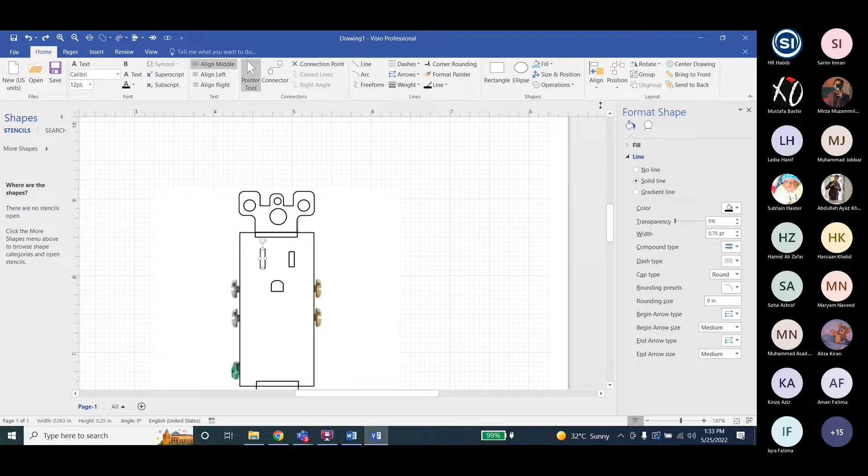You see? For deleting, you can also fill with a black color, but no need for black color, I think so. Like this, you can also do this one. This is also possible like that. Now it's done.

Then you can see these holes, you can group it. This one and this one, group. No, it's one. No, you will copy it here because it's copy paste same. You will copy it, Control C and V, and put the drawing backward again.

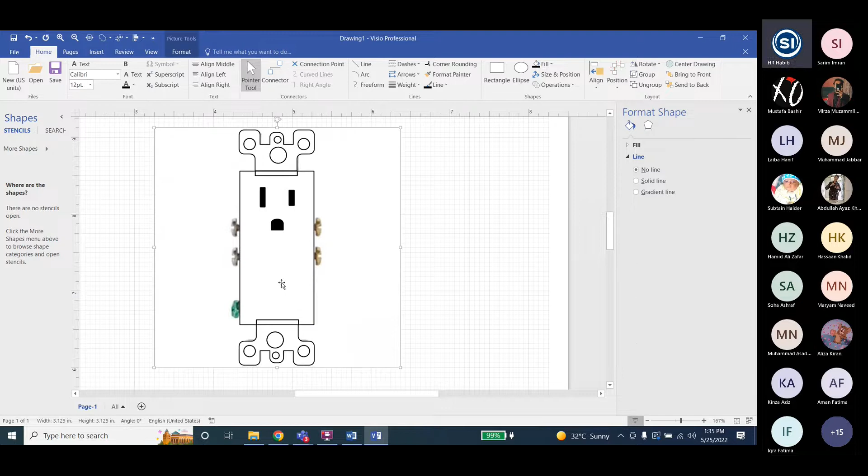Okay, just select that holes. That holes maybe you cannot select. You can group it.

अच्छा हाँ, वो जो है ना, इसको आपने फ्रेगमेंट किया था।

अच्छा, इसको सिलेक्ट करें, जस्ट कंट्रोल जी और इसको फ्रेगमेंट करें। इसको सिलेक्ट करें, होल्स को सिलेक्ट करें, फ्रेगमेंट। नो, पूरी सिलेक्ट करनी है ना, ये करके।

Fragment, select both and fragment. Now you can delete it, for example.

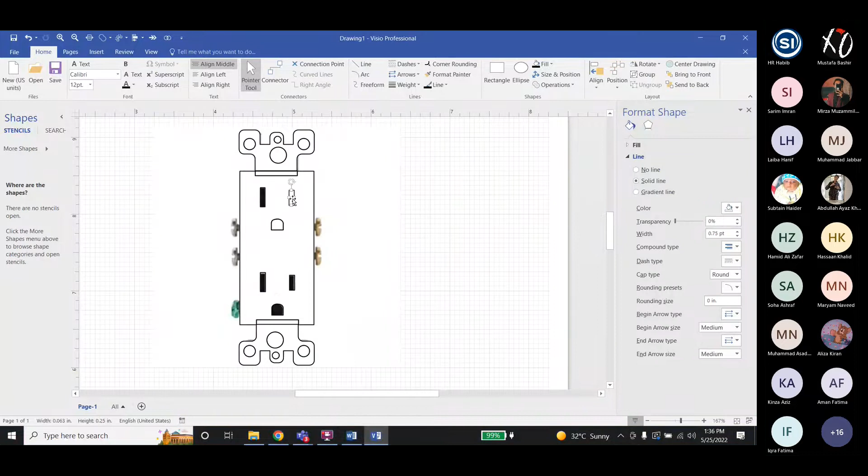अच्छा, इसको डिलीट करेंगे ना, तो डिलीट से आपका... डिलीट ही कर देते हैं। क्लियर कीजिए।

अच्छा चलिए, अभी इसको हम... ये हमारी शेप बन गई। अच्छा, इसके अंदर ना ये देखें, वो होल्स जो है ना, द होल्स आर नॉट, बिकॉज वी हैव टू फिल दिस विद ब्लैक कलर। That was convenient because now it's fragment and there's no hole. You can see this is transparent.

So we want... सर हमने इस पूरे को भी एक दफा ग्रुप किया है ना, तो कहीं उसकी वजह से तो नहीं हो रहा? नहीं, इसको फिल करते हैं ना, बस इनको फिल करें, बस सिंपल। ये हमने फिल नहीं किया ना, फ्रेगमेंट करने की भी जरूरत नहीं है, ठीक है। इसको फिल कर देते हैं, फिर हमारा ये ब्लैक ही हो जाएगा। इसको फिल किया, इसको भी हमने फिल किया था किसी कलर से।

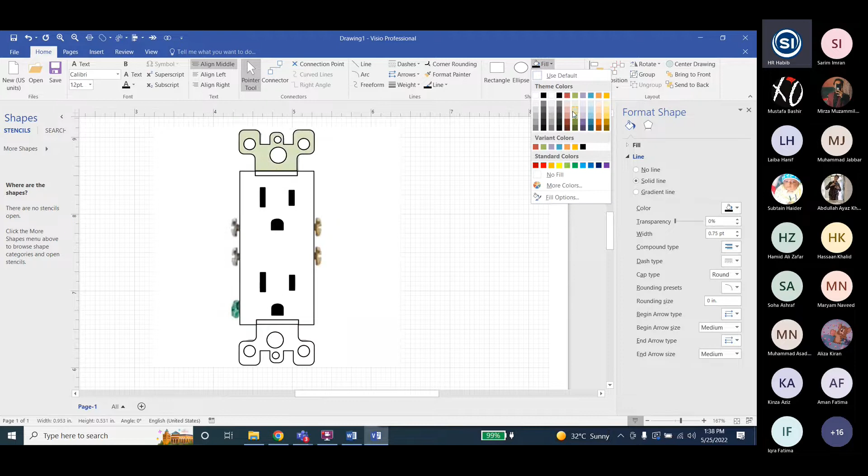चलो, ये तो रिमूव ही हो जाएगा। इसको किसी और कलर से फिल कर दो।

चलिए, अब हम इसको पकड़ के देखते हैं। तो ये हमारी शेप तैयार होगी। इसको जस्ट ग्रुप कर दें। अच्छा, ग्रुप करने से पहले ना इसको यूनियन भी करें, यहाँ से ये देखना।

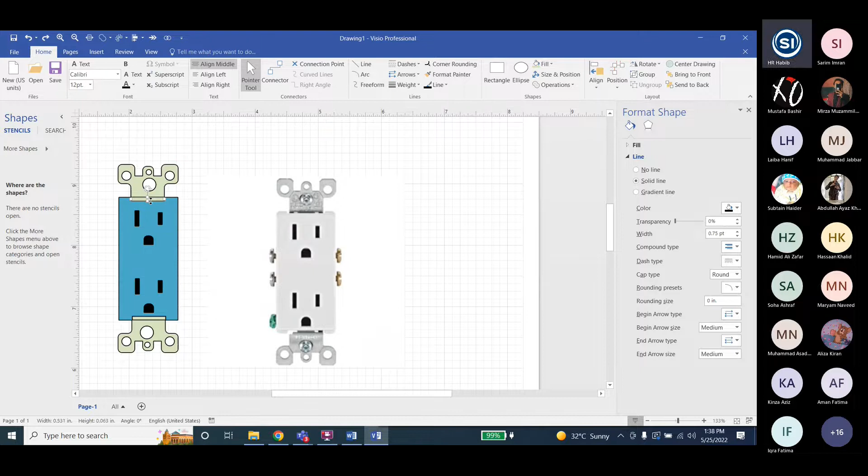अच्छा, इधर इसमें इसको यूनियन करने की, हाँ ये देखना, यूनियन कर दें इसको, इसको और इसको अगर यूनियन करते हैं फिर क्या होता है। ये वाला पार्ट जो है ना, सिर्फ यूनियन करना है हमने इससे। हाँ यस, इस तरह ये वाला पार्ट इसके साथ यूनियन करते हैं।

ठीक, इसको कलर कर देते हैं कोई और। ये आ गया, ठीक। इसको लाइन करना है, सेंटर, लाइन सेंटर करें यार।

ठीक है, अब इसको आप सिलेक्ट करके अगर ग्रुप करें, you can move it anywhere, yeah. So, okay, now it's done. Now these bolts you will draw, and how to draw these bolts. Similarly, you can, for example, this bolt you want to draw.

ठीक है, इस तरह की बोल्ट आप बना लें। कैसे बनाएंगे, एक बना के देखते हैं। Just draw the rectangle to see this one, actually like this bolt, smaller bolt this way, then there is a control C, rotate for example.

Yes, then there is a control C V and like this. Now I will, for example, this one bigger one, so smaller size, okay. Now I will union it.

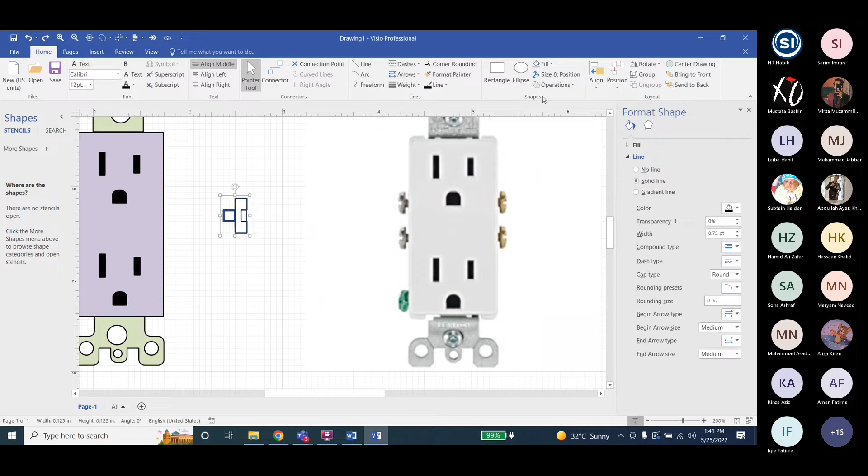Like this. So also maybe I want to delete this one also. Oh no. Select all and fragment and delete this line. Not done. Okay. Not done. So maybe union. Oh yeah, union is okay.

So now you can place it here, for example. You can also drag it here. Now you can place it here, for example, like this.

You can color it. You can change the size. Maybe my size is not exact. You can change like this maybe. Control C and V, this one.

Okay. Now you can select these two and align right, line right. Yeah, so it will be aligned like this. Now you can group it. Control C, V and rotate. Place it here.

Now, for example, select this one, rotate, and place it here. Okay. You can align these, for example, these three, you can align right, left, like this. And you can align these one also. Align...

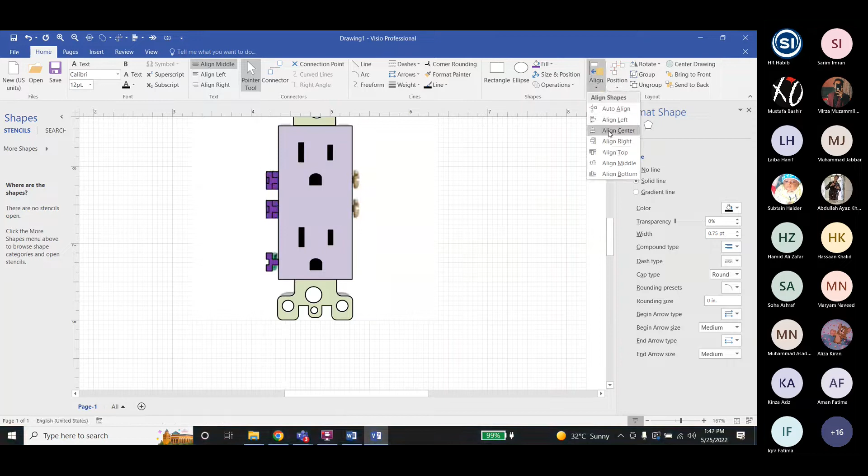No. No. Align middle. Okay, yeah, so it's okay. Now this done, figure is done. Now you can see send to back, no need.

You can color different color if you want to color it. This with different color. Okay, now then it's ready, I think so. No connection point, yeah. Now it is ready. Figure, I will just draw it here.

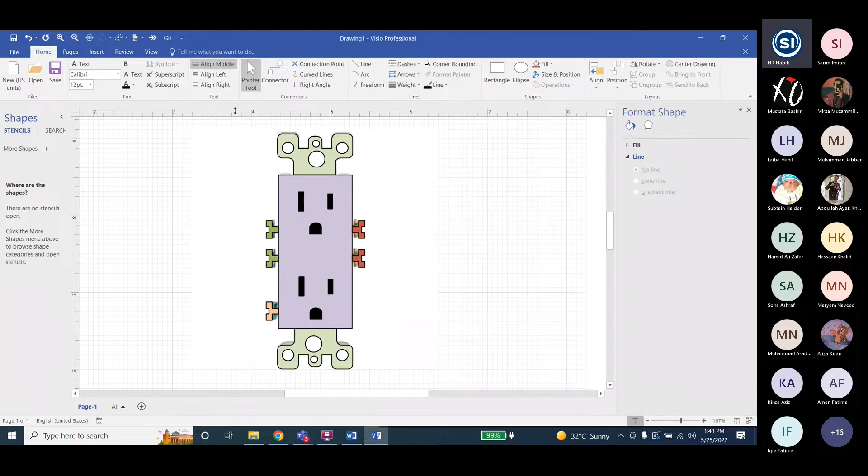Now this is my figure, I can group it. Now it's a group. Now this figure, no need. My figure is ready. No connection point.

Connection point, just go to connection point here, just connection point, and just zoom it and click it here. Control is just hold the control button, okay, from the keyboard, and press left click here, single left click. You see one dot is placed. No connection point is ready.

From here you can connect any other diagram. Now again hold the control button and then press left click here. Here the connection point ready. Now at this side, this one, then this one.

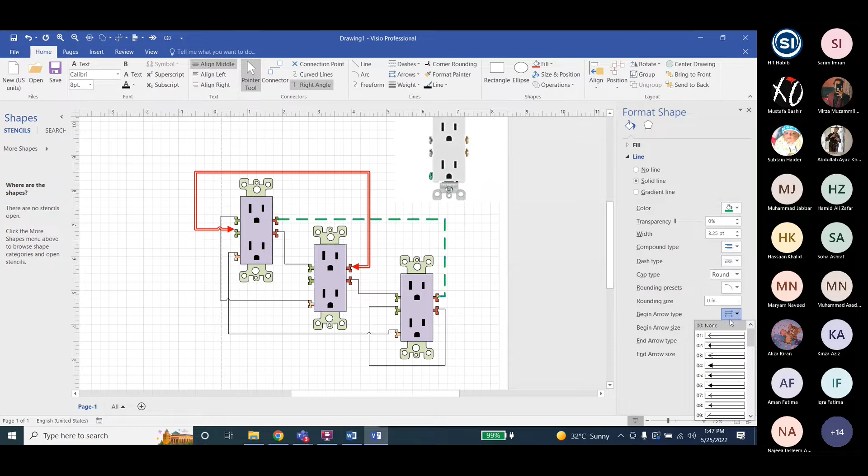Like this, okay. Now I want to repeat this one. For example, click it here, and there is a last time we used. Wo option kya tha bhala last time jo humne use kiya tha, isko copy paste karna hai na, same format.

To dekha format painter here. Format painter, just click it here, click it here, click it here. For example, the same. Now format painter, click this one. Format painter, double click format painter as my lines, as you can draw like this.

This way this is done. Now control CV, and this shape I will save it. Now this is done. Now these figures I will save it as stencils. Okay, stencils. Last time we also done more shapes.

There is a new stencil, and just drag it here, and I will name it, for example, your lab is ED6 C and C. I saved it. This is one, and this I will, for example, I will also group it.

This is now one figure. I will drag it here. This is ED6 C group. Third session and group is C2.

But save. I will save. I will save it to Lab6 ED6 C-C. Save. Okay. Now it's saved. If I want to use it as many as I can use it, and similarly I want to use this one, so I can use it in this way. Okay. So now it's saved.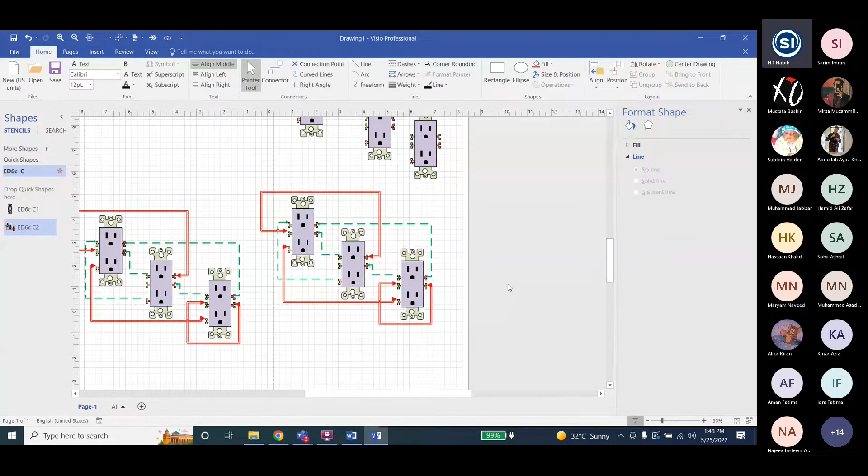Now the previous saved, for example, I want to open it. So go to open stencil and go to Lab6, and this one, for example, we made yesterday. This one. So you see, this one is this. We made as this one, and this one was this. So this was last time saved. Okay. So these you will save it so that you can use it in future.

I also saved some previous open stencil. Maybe Lab 3. Yeah, in Lab 3 we saved. For example, these three also, all three. You see, this shape we used last time, this shape we used last time, this shape we used last time, and these we have drawn.

Similarly, stencil 10, this shape, and this shape, and group 1, this shape, like this. You can see these all saved. So you have to save it. Okay. In the end, all these should be saved.

So for example, today's work, I want to save it into Lab6, trying to. So I will save all the like this. So in this way, you can see you have done this one.

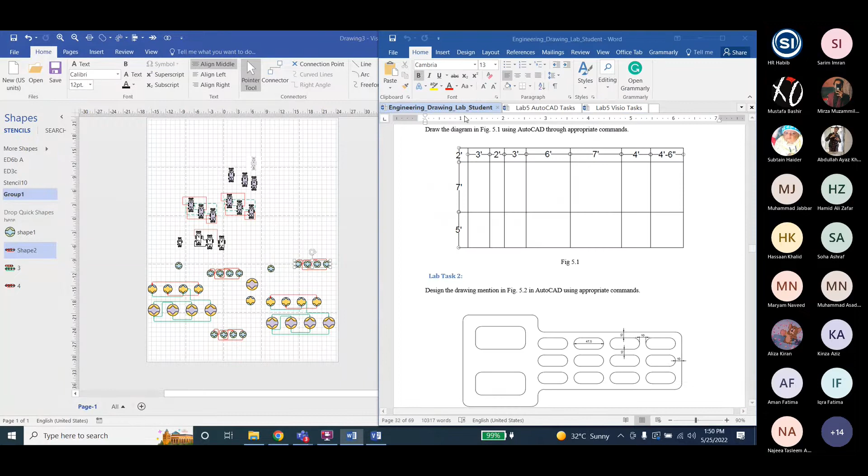Now our time is still remaining, I think so. So we can also finish. Trim we already done. Lab6 and Lab6 trim command is done. Scale command is done. Yes, scale command is done. Trim and scale done, and break and extend and stretch. These three commands will do, and Lab6 will also be done.

Okay. So in break command, for example, this done. Visio off. Go to AutoCAD, and we want to finish AutoCAD.

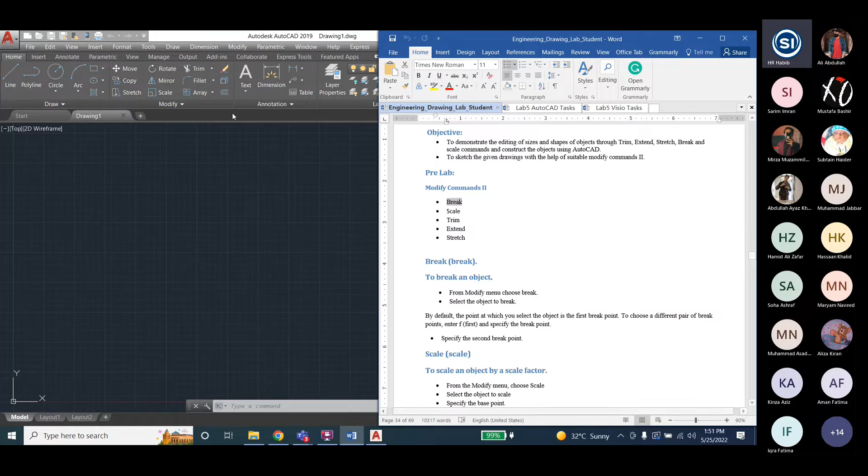Break, select the object, for example this object. Now I want to break it. Specify second break point, this break point. So the circle is broken. In this way you can use the break command.

To choose a different pair of breakpoints, enter F first and specify the breakpoint. The point at which you select the object is the first breakpoint.

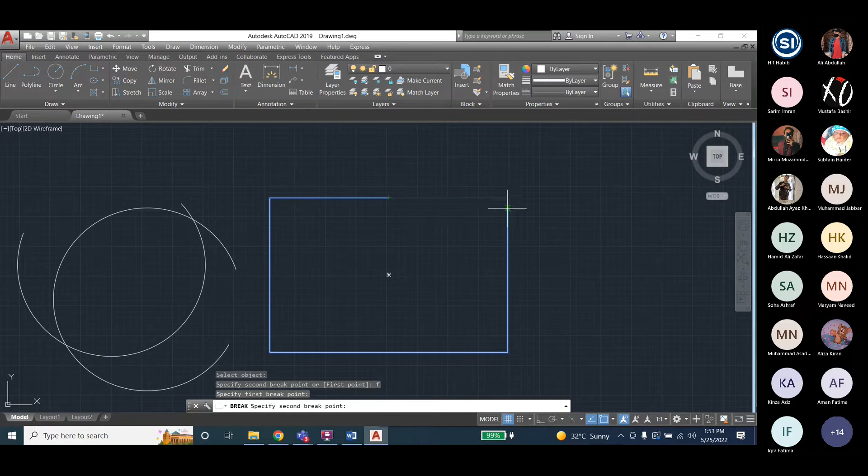Then there is scale, which we already did, I will repeat it. For example this one is circle, I want to scale it to another size, I want to double it. Scale, click it, press enter. The base point is this one. Now I want to reduce the size to half, 0.5. So the circle is reduced to half.

So in this way scale command is done. Trim we already used, again I will apply trim command. For example this is a circle, and I want to draw this circle here. Now I need this semicircle, this portion only, and I want to delete the remaining. So I use the trim command, select this object, right click or enter. Then whatever you want to delete, you can delete. For example, delete this portion, this portion, this portion, escape. Now this is remaining. So in the trim command you can delete anything you want.

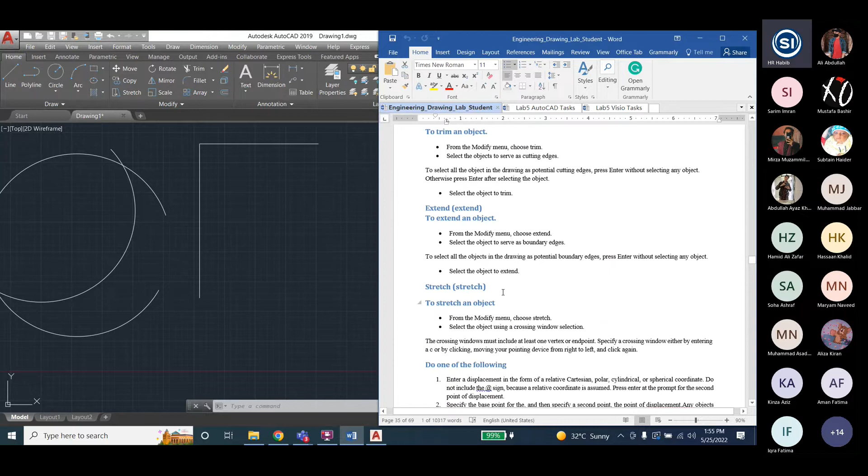Trim, extend and stretch. So scale done, trim done, extend. Now I want to extend the object. For example this is my object, I will group it. This is my object now.

I want to use the extend command. Here is the extend command, it will say select object. I will select it, press enter. Now it will say extend it. For example, I want to extend it, specify opposite corner, specify opposite corner.

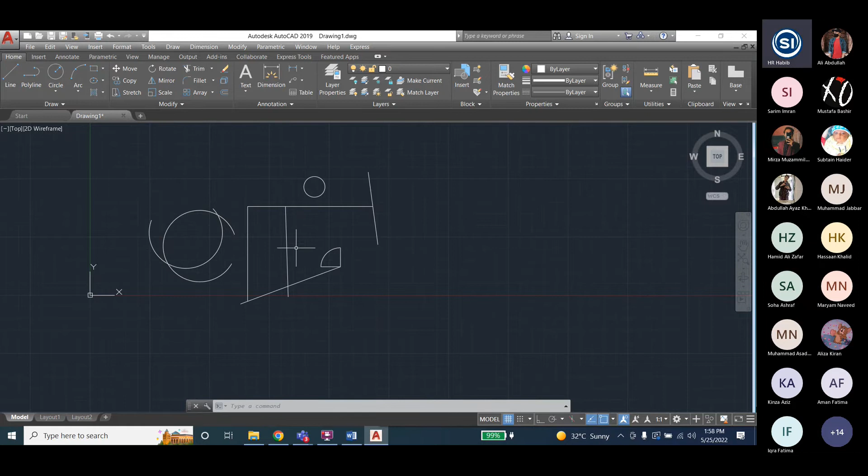Let's see how Stretch works. Go into the Stretch command and select the object, this one. Okay, specify the base point, base point is this one for them.